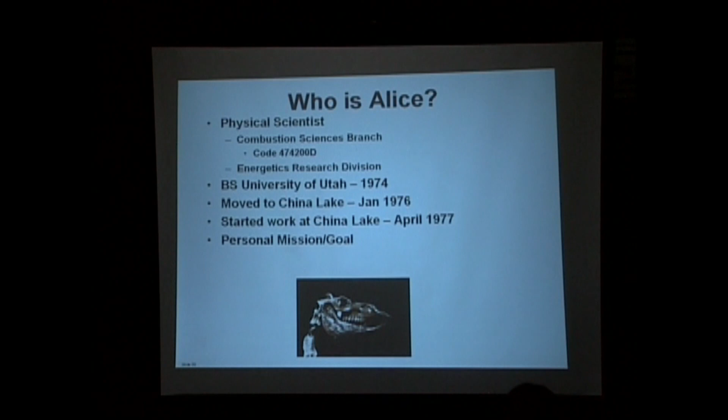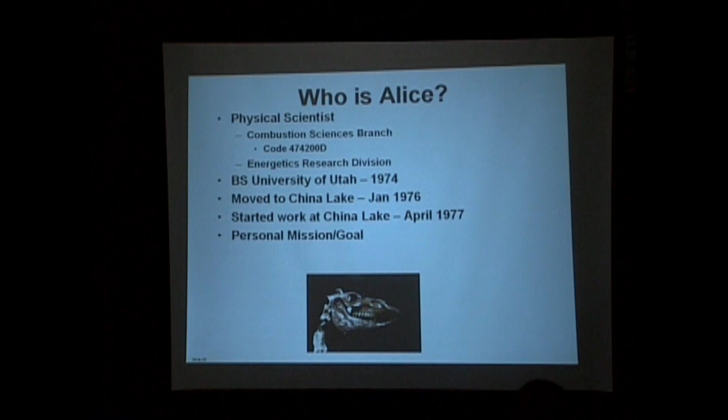The question you might ask is, who in the heck is Alice, and what did she do at China Lake? I'm a physical scientist. I work in the Combustion Sciences branch, in the Energetics Research Division. I got a bachelor's degree from the University of Utah in 1974, and my husband and I moved to China Lake in 1976. I mention this because Ken is the person who was hired by China Lake.

I just came along - we were newlyweds, so he's to blame for my being here. I started working in April of 1977, and since we're telling a story, there was no visit. Ken accepted the position here at China Lake without ever coming down for a site visit. We jumped in our two old cars in Utah and drove down here to move. It was January, and we left 1.5 feet of snow in Salt Lake City.

When we came down and got to about St. George, it was like heaven. So I said to Ken, never let me complain about the heat. Have I complained about the heat? No. Good. Okay, so imagine I stop in Barstow for directions to get to 395, and the guy at the gas station said, 'Lady, you're going into God's country. No one else wants it.'

Okay, so we drive some more. I get to Red Mountain, Johannesburg - it's like, Red Mountain, Johannesburg, what am I getting into? So when I got to Ridgecrest, things really looked good, and we've been here ever since.

So could you hit that again, please? A long time ago, we were all supposed to be empowered and have personal mission goals, and I really clicked into it. So this is mine, I'm going to share it with you: to provide the Navy a unique experimental capability relative to energetic material combustion. That's my personal mission goal, and I hope I can inspire you to have yours.

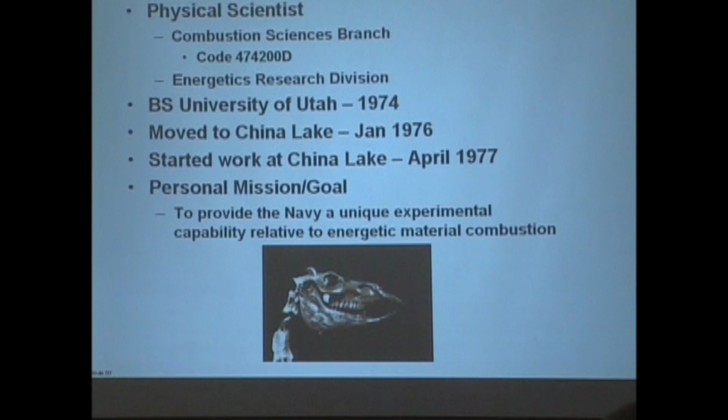We joke that I'm old as dirt - this is dirt down here. It's actually a skeleton from the La Brea tar pits, and I've never been that thin, so I don't think I'm quite dirt yet.

So what do we use these for? They are used to gain understanding, looking at ignition and combustion, and we do a lot of them. I hope today to weave together these tests to give you a story about ignition and combustion behavior.

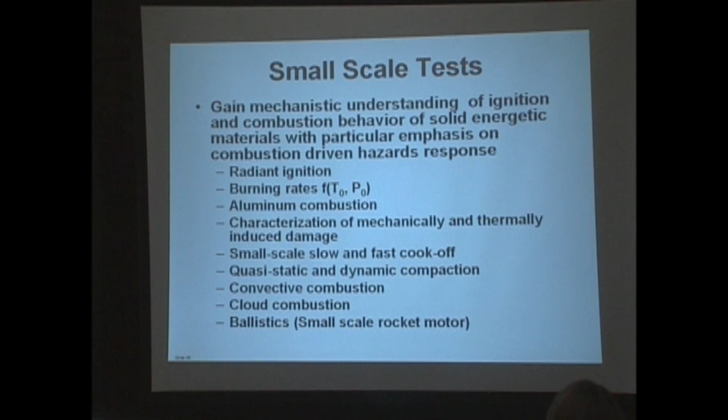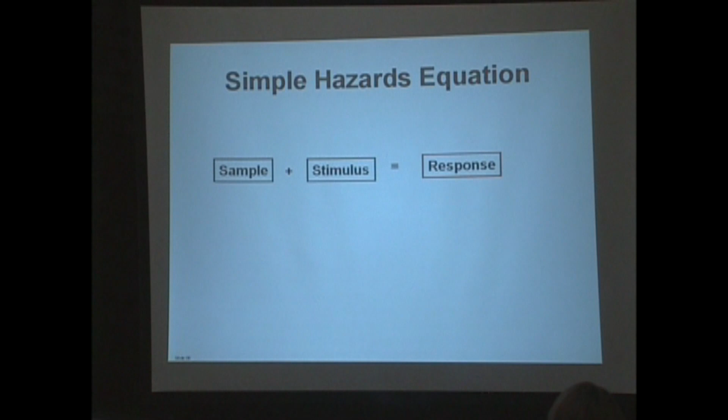From a very simplistic standpoint, what we want to know is something about the sample, the stimulus, and its response. Very simple. So when we talk about sample, I'm going to be talking a lot about propellants today, but it also applies to explosives and pyrotechnics. We're going to focus on solids.

Propellant in itself often presents the largest target when you're thinking about something coming under attack, from an insensitive munitions concept. So that's something to think about.

We have two regulatory bodies we have to be concerned with. One is hazards classification, for transportation and storage. That's the placards on the trucks you see driving around, the 1.1, 1.2, 1.3 kinds of things you hear talk about. The other is for our IM, insensitive munitions. Both of them are pretty critical.

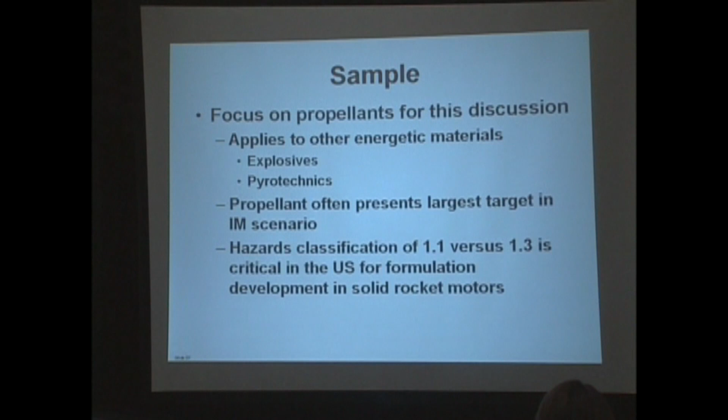When we talk about energetic materials, there's a lot of them: explosives, propellants, pyrotechnics, and even the neat ingredients.

I was very honored to be able to work with Dr. Arnie Nielsen in our chemistry division on CL20. It's an amazing compound, and it was an amazing piece of work, a real honor to work with a fine gentleman.

So we talk about stimulus. Usually we break them into two parts: the mechanical stimulus, which is shock or impact, and then a thermal stimulus, which can be either direct or indirect fire. Usually accidents involve both mechanical and thermal stimuli.

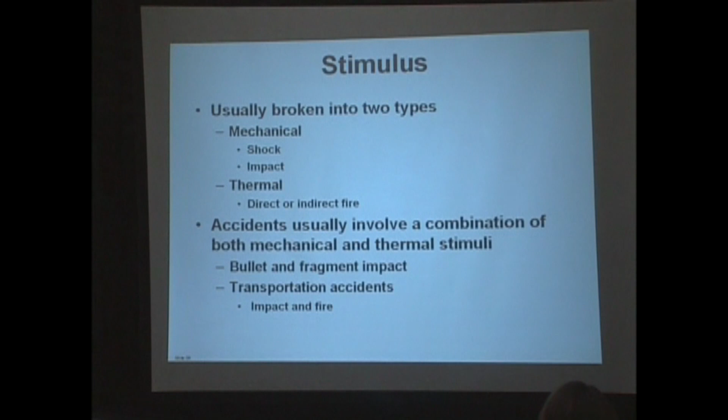A couple of examples: bullet and fragment impact, and transportation accidents. Usually you have an accident, there's an impact, and then there's an ensuing fire.

So when we talk about response, what do we mean? Lots of people think about detonation, but there's a lot more to it than that. You can have something from nothing clear up to a detonation, and we want to understand what is it that will cause our energetic to progress up to that high energy, more violent reaction.

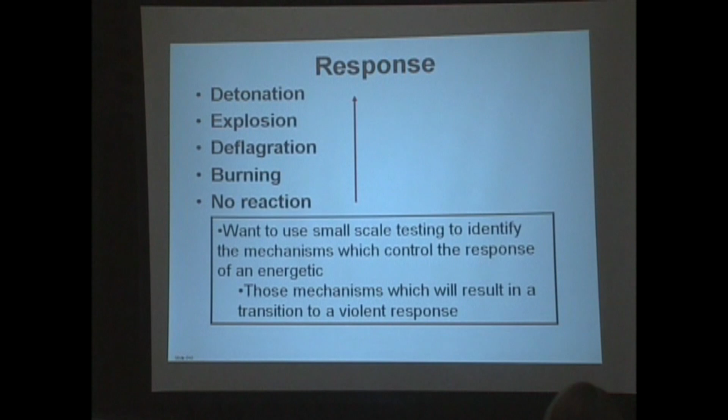So we're going to focus on combustion-driven events. Usually when we're talking about combustion, it's from the standpoint of, is my rocket going to fly, or how far is my rocket going to fly? We want to know about ignition, flame spread, and then the steady state burning.

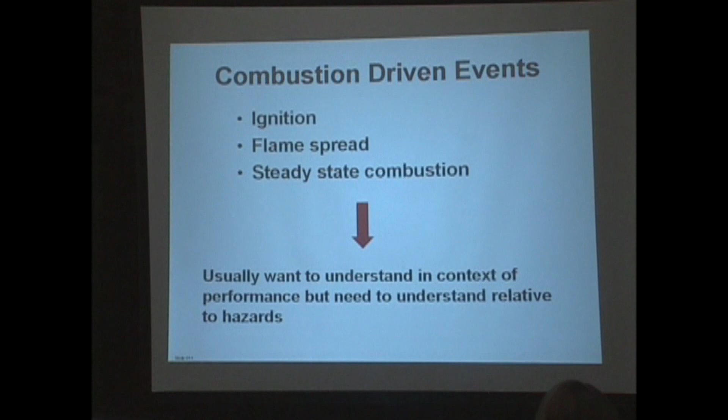From a hazard standpoint, we need to expand our horizons a little bit. We need to expand our viewpoint.

So let's start with ignition. It's a process, by our definition, the process and the successful completion of that process. It's the beginning of every combustion event. Propellant must ignite reliably in the application, but be immune to inadvertent ignition. It's going to go when you want it to, but not go when you don't want it to go. If it doesn't ignite, your motor and payload become an impact hazard themselves.

You can have significant blast and overpressure without true detonation, and we're going to look at a film of that today. The payload itself may present a hazard—if you have a nuclear battery on board, that could cause you some problems. Inadvertent propellant ignition also creates a thermal hazard.

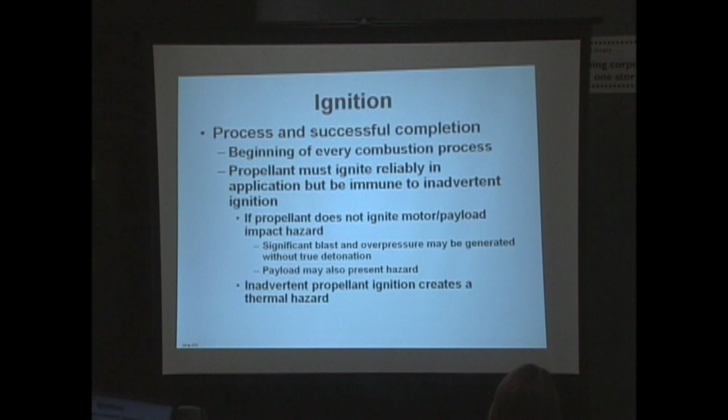Some people in our group have been studying this, and many people in this audience have worked on that, where a rocket motor in a building, or in a storage building, caught on fire.

Here's the real deal, this you can find on the internet. It was a firing of a Black Brant rocket on 6 March 2005, Poker Flat, Alaska. Good thing it was in Alaska. The second stage did not ignite. The findings were that the igniter functioned but failed to ignite the propellant grain.

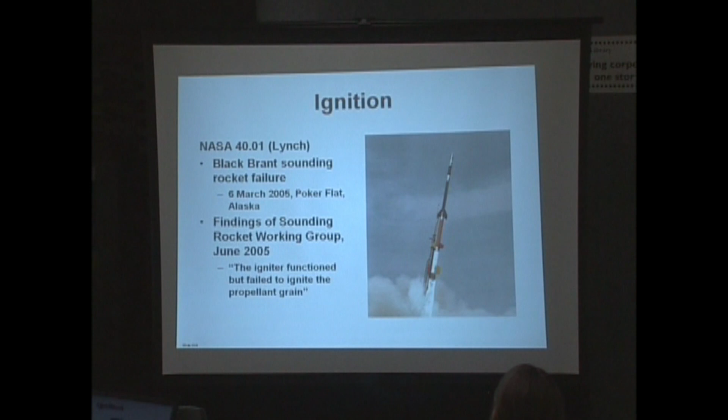I show this one because Mr. Ford had the opportunity to work with these people. The propellant is made in Canada, and they sent us propellant. We tested it for them, and we've worked with them on two other occasions helping them design their improved igniters.

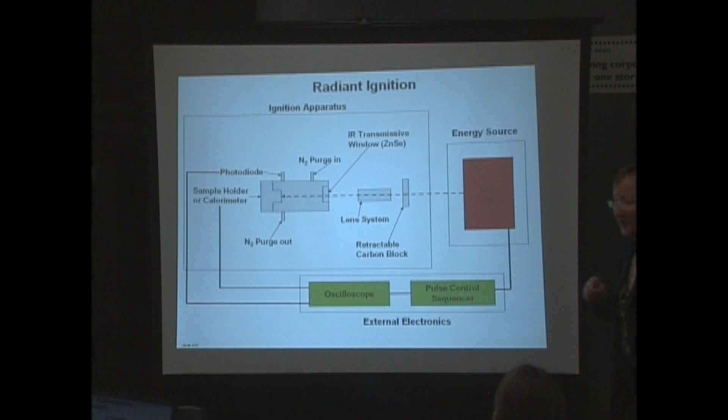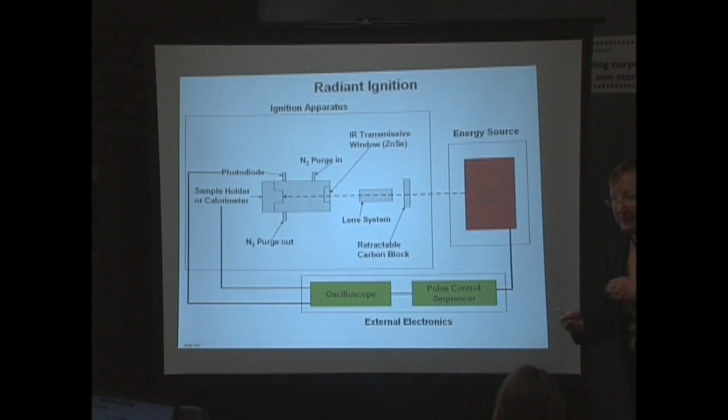So what do we use for that? We have a CO2 laser that provides radiant thermal stimulus. We have some lensing, we have a sample holder, and what we do is vary the amount of time we expose our sample to get an idea about how it's going to ignite.

We plot our data in log time versus log energy. I'm going to show you some of these plots, so we'll spend a little bit of time with this.

If we pick a flux level and start to heat our sample, and turn our laser off in this region and look at our sample, we see nothing. It's not until what we call first light, or first gasification, that we start to see something going on the sample surface, some erosion coming off the sample. But many times the sample does not continue to burn. It's not until we reach what we call a go-no-go ignition locus that, if we remove that energy, the sample will continue to burn. From our perspective, that's the point the thing is truly ignited, not down here.

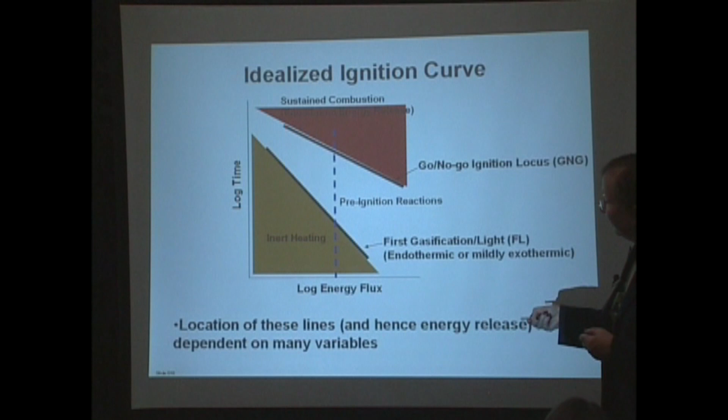Now, my European colleagues would argue otherwise, so we have some open debate here. The relationship between these two lines is very much a function of the energy, the flux, the pressure, and the kind of material we're testing. So let's take a look at a few examples.

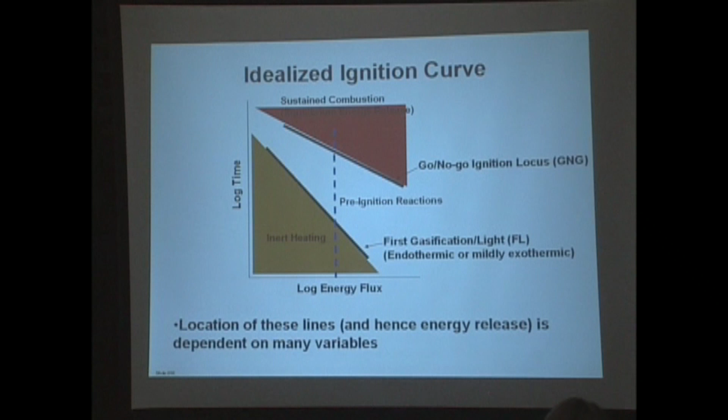However, you can generate a lot of reactive gas. When we start to think about hazard, and especially DDT, that's an important factor.

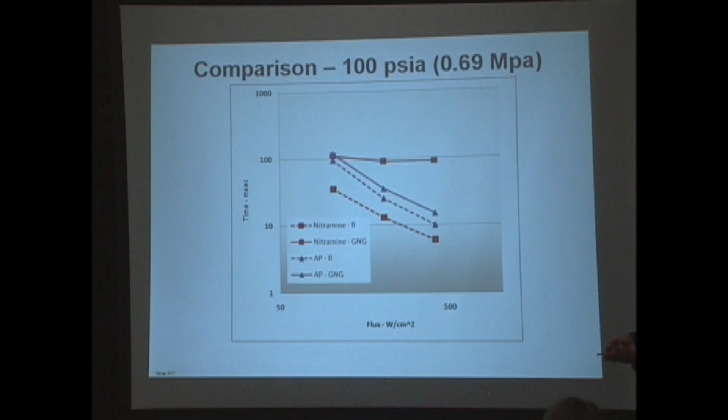Keep that in mind, we're going to come back to it. That one's going to come back to bother you in a few minutes.

A general observation: AP-based propellants will ignite and burn at low pressure with little or no pre-ignition time. This means increased vulnerability to friction and fire stimuli, there's the hazard. The relationship is also there in something called burn to violent reaction, or fragment impact.

Double base or nitramine-based propellants, which are often our 1.1 type materials, are more difficult to ignite at low pressure and often have a very long pre-ignition time. That contributes to the DDT problem.

Within a family of propellants, this is why I said keep in mind coarse versus fine. The higher the burning rate, the easier the propellant is to ignite. So now you're going to predict which of those two AP-based propellants has the highest burning rate.

Fine, fine. So let's talk about combustion.

Very simplistic: gas production in a closed or semi-closed environment is key to reaction violence. How much you confine it really is important. The opposite is, the sooner you vent, the more you can ameliorate your hazard. It really can separate between propulsion, explosion, and even detonation.

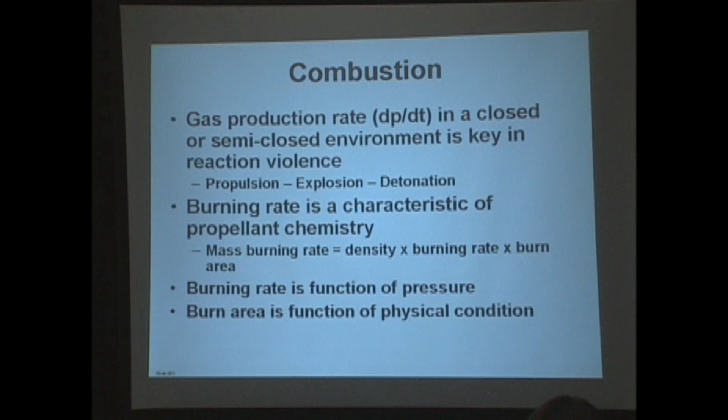Okay, let's try our Delta rocket.

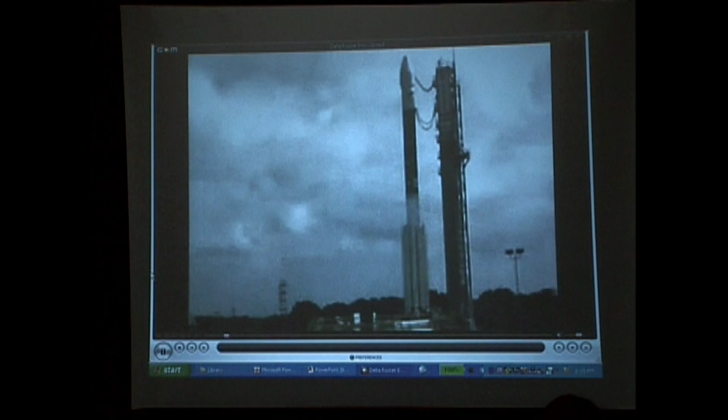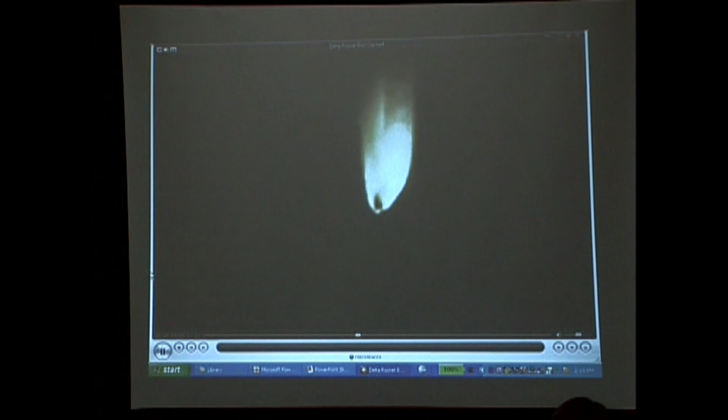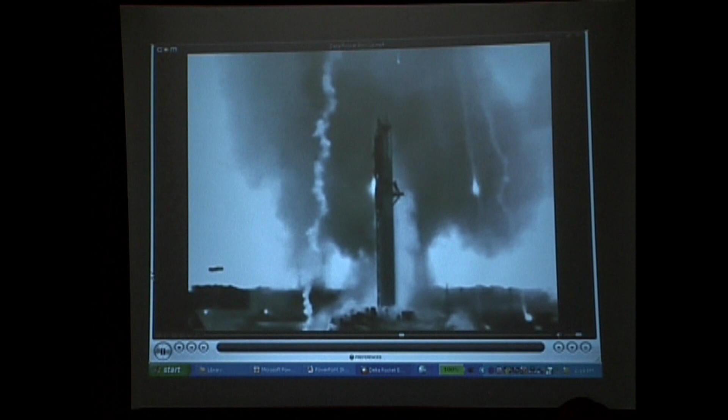Crack. Surface area?

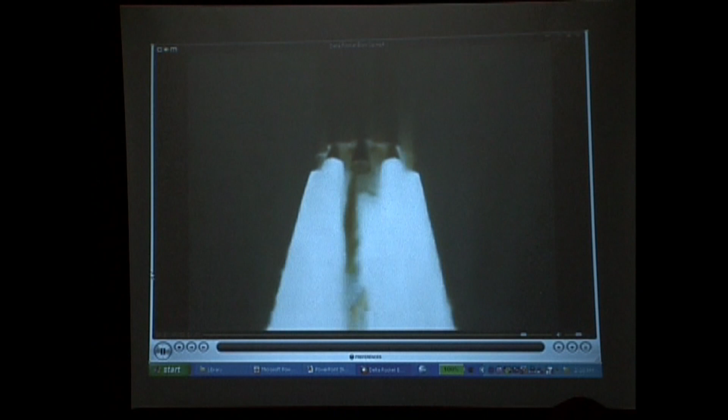This was in 2006, so not that long ago.

We couldn't figure out how to embed it, so this is the best we're doing, and I think it worked out pretty good. You can find this on Google if you want it, that's where it came from. I was told that some people at PRL worked on this, on Delta, after this incident occurred, and some people here at China Lake were involved in some of the studies done for this.

Okay, next slide. We take pictures too, but not quite so spectacular, and much, much smaller. This is a diagram of our high-speed setup. We use this to measure burning rates and combustion studies. We put a sample in a vessel, a windowed vessel, and use a high-speed motion picture camera to take a picture of it burning. Occasionally we have to use illumination to look at the material itself.

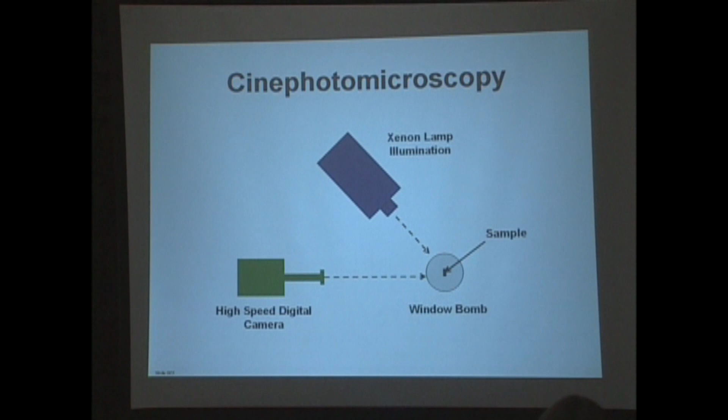So I'm going to entertain you with a few more movies. Some people ask, what's the difference between minimum signature and what's smoky or fuel metallized samples? And the answer is there's no metal in minimum signature. If you have a sneaky airplane, you probably want to have a sneaky missile as well.

Now, when we talked about a hazard, this propellant could become a hazard. What's the flux these things put out? We need to understand what's going on. Perhaps we need to look at this material a little closer. So let's look at the next slide. Oh, okay, I'm ahead of myself, sorry.

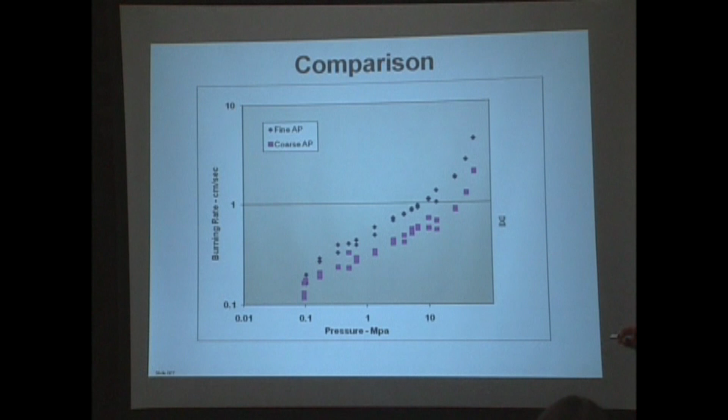And that's some of the work that Amber and her team are working on right now, to make it so that these new propellants coming out do not burn so well at low pressure. Okay, so now we'll go back. Go ahead, go forward. If we really want to understand what's going on the surface, we have to increase the magnification, and so that's what this is.

So let's break it up. We talked about the crack. Now let's make a mess out of this thing. Next, to do friability, or what's sometimes called shotgun work, it's really two experiments. First you have to damage the material, and then you've got to figure out a way to evaluate it. So we use a high-impact device or a shotgun to damage the material, and then we use a closed bomb to evaluate that damage.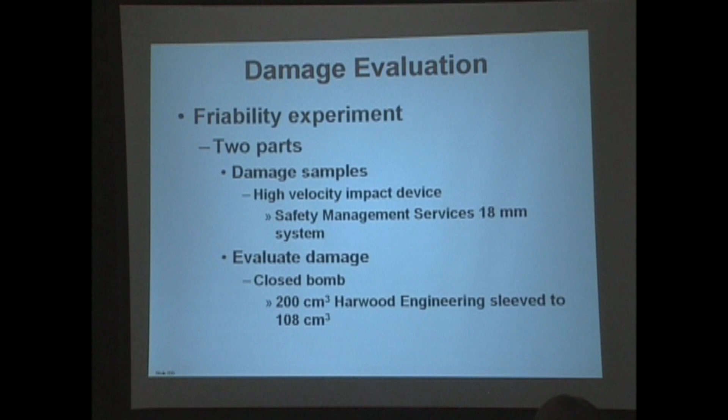Right now, to do that, this is a test that's actually used for hazards classification. It's called friability. We have to sleeve it to follow the spec, to 108 cubic centimeters. Next, here's a layout of the experiment, very simple.

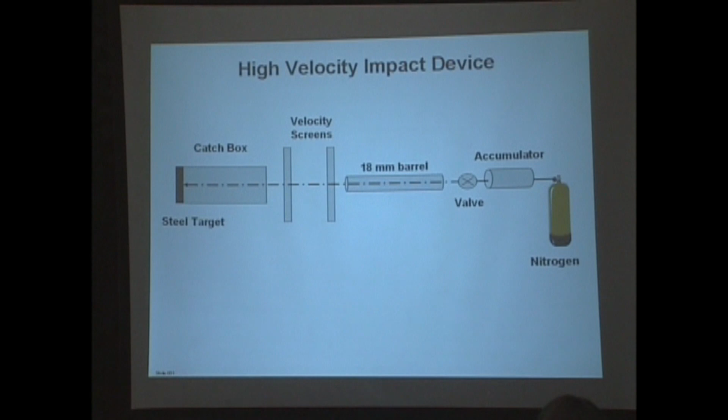We have a gun. We can fire it either with gas or a powder load, depending on our velocities. We fire it into a catch box, gather up the debris, and then we test it further.

Next, so here's the deal. Do you propel the propellant sample, or do you shoot the impact propellant? We propel the sample - a cylindrical sample. That's why it's shown like a cylinder here.

First, closed bomb theory, for those who do burning rates for gun propellants. You would fire a sample of known geometry, collect your pressure time history, and use that equation we talked about: m dot equals density times the linear burning rate times the burn area, put that in the form of a geometric form function. You calculate your thermochemistry to get your m dot from your pressure time history, and you can solve for your burning rate as a function of pressure. It's done all the time. It's been done for years.

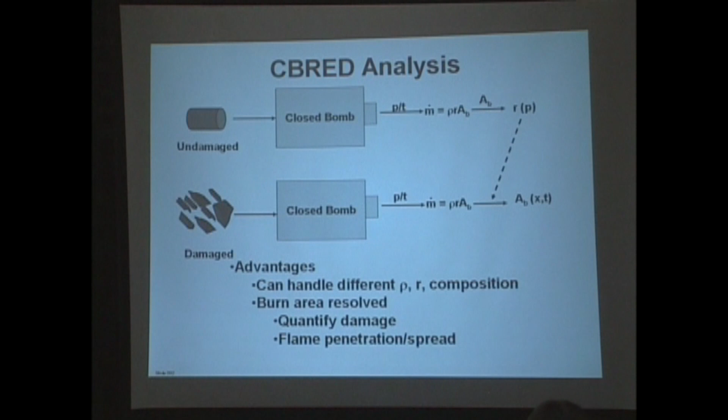Okay, let's get clever now. Let's say we damage that same material. We sub in our burning rate into this equation, and now we can solve for the area. There's an advantage to doing this: now we can compare materials with different burning rates, because we've taken that out of the equation.

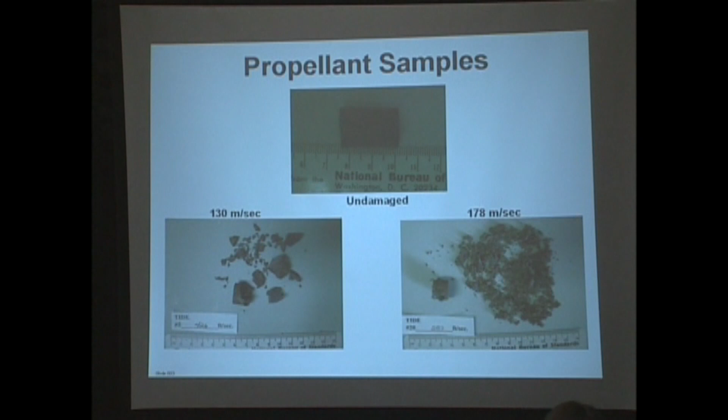Here is an AP HTPB-based propellant, undamaged, and at two different damage levels. We can fire these fast enough that we can turn them to dust. In fact, we can even ignite them if we go fast enough.

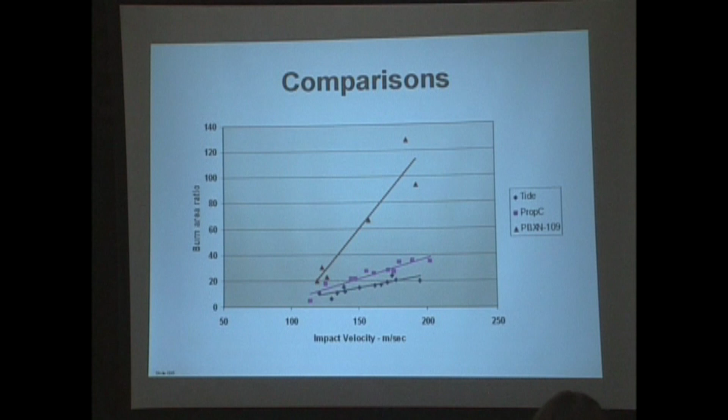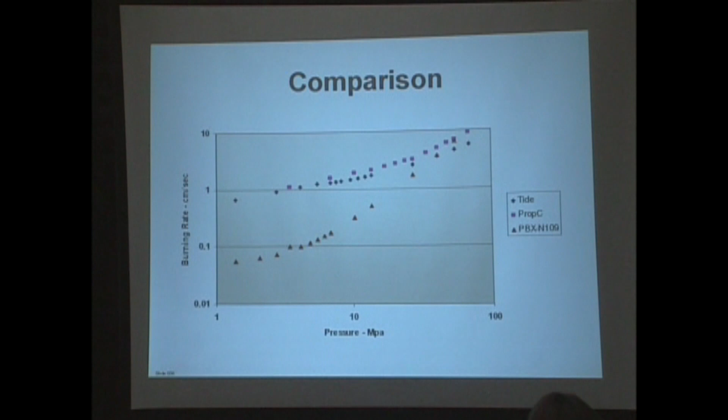Now we've really made a mess of things. We've got it into almost dust.

One of the ways we study this, and most recently, that's how I caught Anne's attention, was I was talking about this experiment. What we do is we throw a piston into a bed, a porous bed, a bed of energetic material. This experiment is the design of Harold Sandusky and Wayne Elban. Sandusky is at NSWC Indian Head. I wish I'd invented it.

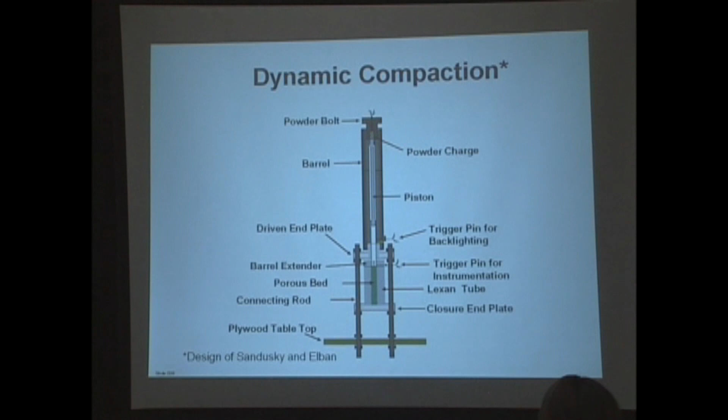It's a great experiment. The piston comes down, strikes the bed. Now we can instrument this bed to look at various aspects of what's going on in the powder. We're using this right now to examine pyrotechnic powders, but it was designed for things like HMX.

So let's look at this. Our piston is going to come down at 162 meters per second, strikes that bed. Now we see behavior, really two kinds of behavior coming along. We see that compaction wave, and then we see the great ball of fire, if you will.

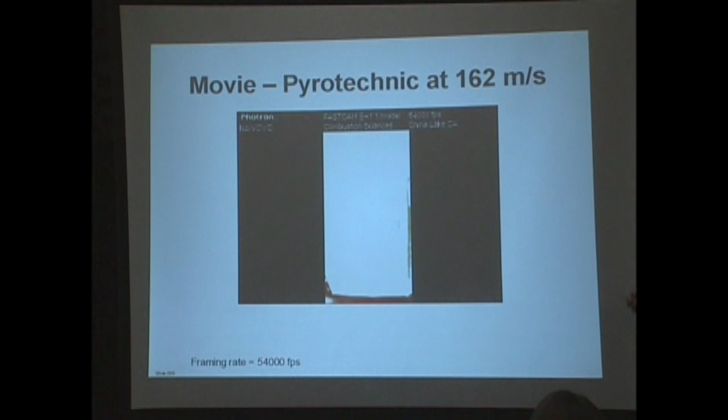We can take some frames, and you can see here very easily how we can make some plots of these two things. These data have been used to develop a powder model, which is then used to predict the behavior of this material in its design, in its system.

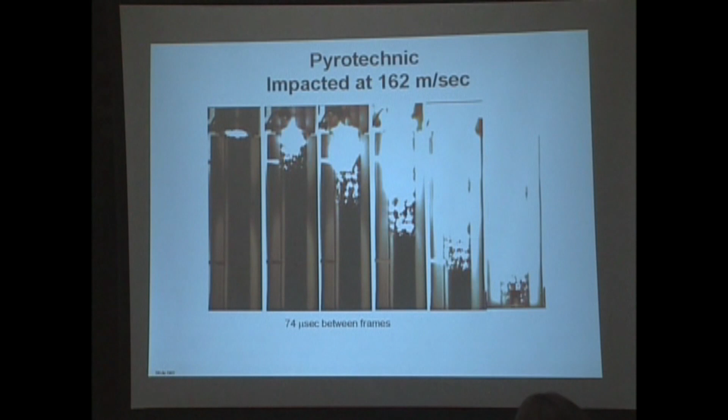And here's the plot of the stuff you just saw, and there are the two various rates. Remember, it was 162, they go quite a bit faster, but they are a function of how fast we throw the piston. So this is, we've determined from flash X-ray studies as well, the compaction wave.

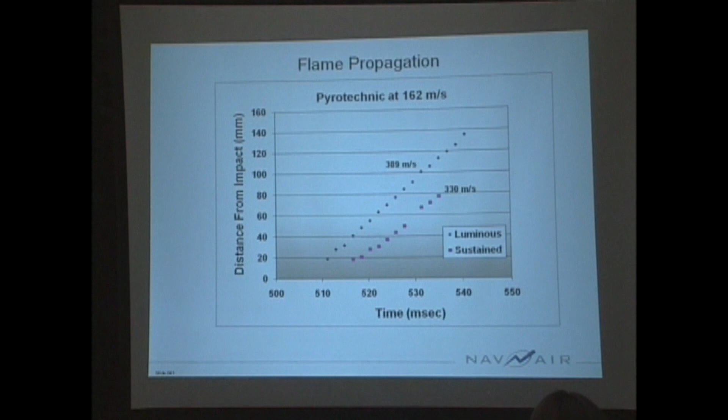And most recently, we've concluded that this behavior for this material is the friction on the walls. This material is highly friction sensitive, and so we're seeing the friction behavior on the wall, between the material and the wall. You mean the friction heat generated by the friction? Exactly, yes.

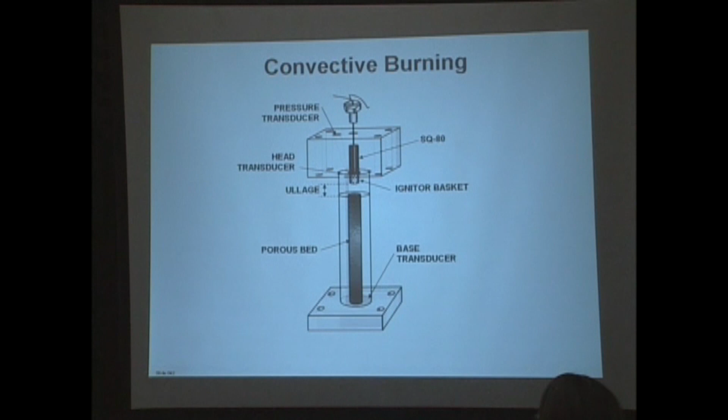So, okay, let's take away the piston and look at thermal. Instead of using a piston, we will initiate this material thermally. Many times there's a difference in the sensitivity of a material, whether it responds to a thermal or mechanical stimulus.

Okay, next. This is for the explosive PBXN-5, and PBXN-5 is mostly HMX. It has about 5% of an inert binder, if you will, sometimes called a desensitization material. So I'd like to point out these numbers.

We tracked that flame going through the bed, and we have 18 meters per second and 271. This is classic behavior for something going to DDT. Next.

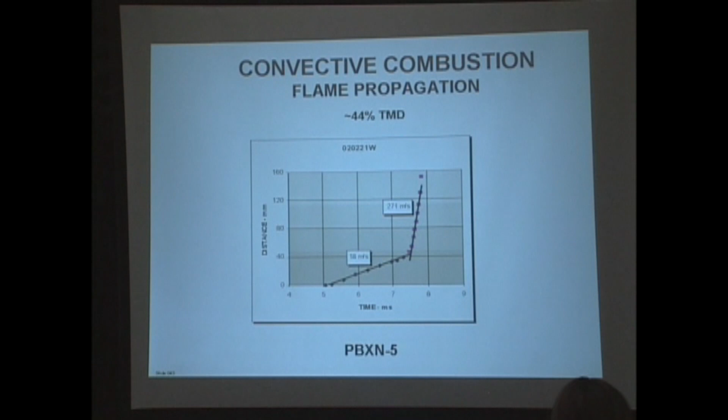Here we have a plot of burning rate versus pressure. I've overlaid the neat HMX burning rate curve. Let's just pick this number right here: this is 55 centimeters per second at 200 megapascals. I believe that's about 30,000 psi. And okay, we got a little discrepancy here.

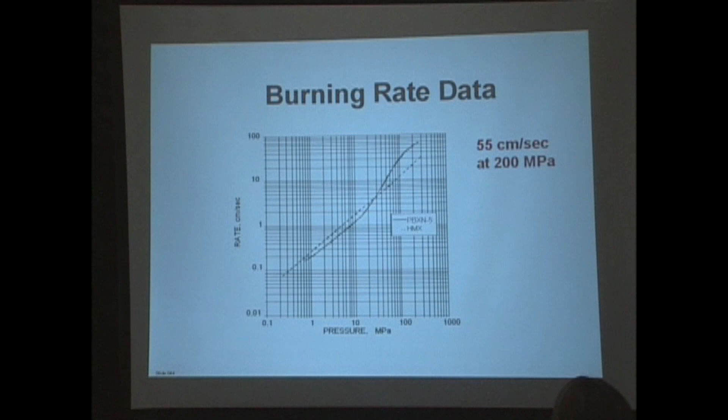Remember the last one? Next slide. We have a rate, a big difference in the rate here. One of these wasn't really burning completely in the sense that we talked about complete combustion.

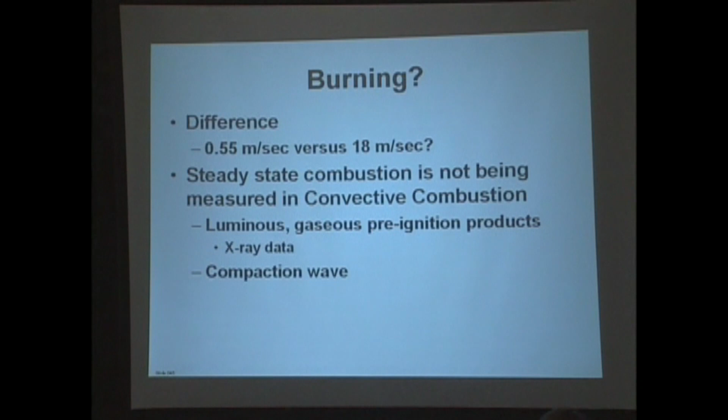Much of that is our pre-ignition products. It puts out lots of light, and that was confirmed by our X-ray data. Most of it is the compaction wave that we're measuring. To let you know, Mr. Curran, who made these measurements, the flame was clear, or the apparent flame was clear to the bottom of the tube before any pressure was measured at the bottom of the tube.

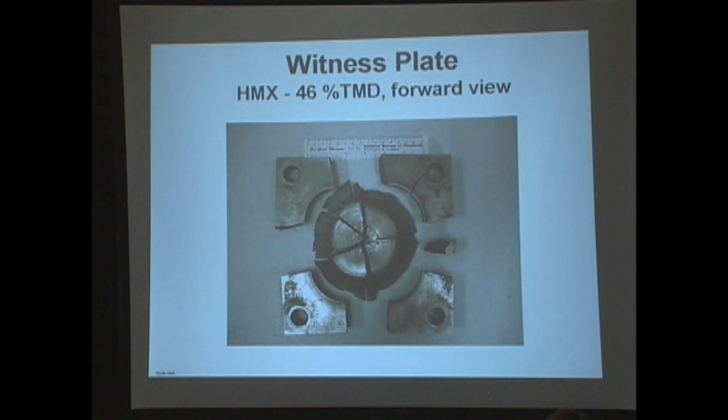Okay, next. What if we take away that desensitizer and just do pure HMX? Next, the rates are almost the same, but there's the witness plate. So there's an example of the two. 5% makes a big difference in what you've added.

Next. Okay, one of our more current work is the work on cook-off. These are images taken from the Forrestal. The accident occurred in 1967. The Navy lost 134 people. This is part of the reason that I continue to work today, because this is a hazard that we haven't made a lot of progress on, even after all this time.

Next. Thermal insult is of a particular severity for the Navy. When you're on a ship and there's a fire, you don't have a whole lot of places to go. The potential for fire is very high. The potential for ordnance to be involved is very high, and there is no getting out of it.

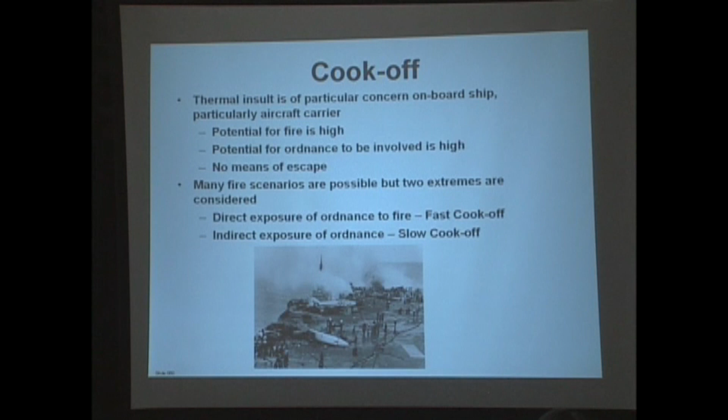Many fire scenarios are possible. You can come up with all kinds of things. We hear about different ones every day. For this regulatory issue, two are considered: direct exposure, often referred to as fast cook-off, and indirect exposure, called slow cook-off. In other words, the fire is adjacent to your store.

Next. So IM testing, you have to test with both of these. Slow cook-off, the conditions are 3.3 degrees C per hour. This comes under a lot of criticism. Everyone says it's unrealistic. There used to be the opportunity for a threat hazard assessment. Some of that's going away now with jointness. Whose threat do we use? We use these ordnance items in many applications. Whose do we pick? So that's coming under scrutiny as well.

Fast cook-off, the conditions are fairly widely accepted. This is where you put the item into a fuel fire. However, that fire is very difficult to control. It's pretty expensive to run that test. Environmental concerns are big. Germany right now has banned it, the use of liquid fuel like kerosene.

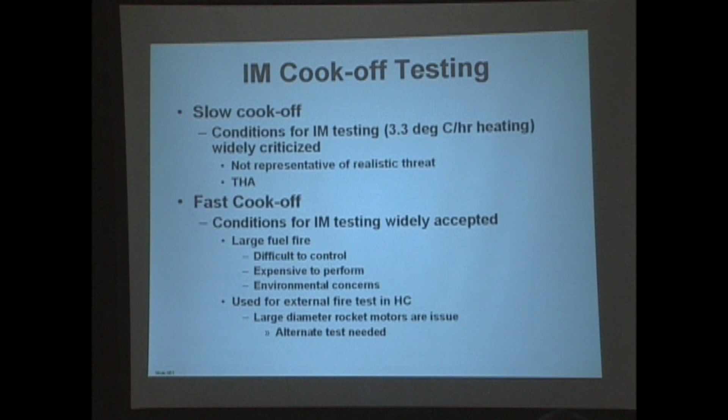Large diameter rocket motors become a particular problem because of their size, the amount of fuel that you need, and the amount of time that's required to burn that fuel. So we need, from our perspective and opinion, an alternate test for that. Next.

This is a small-scale test that we used in concert with some work we did jointly with the Department of Energy. Essentially, it's a pipe bomb. You cartridge load up your samples, heat the walls, and measure what goes on. Next.

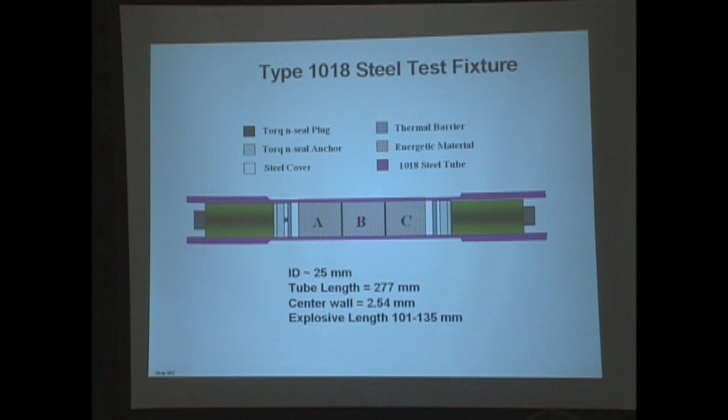Now, we're back to my drumbeat about surface area and porosity. This is LX10, another nitramine-based explosive. It's a pressed one. We're very fortunate - it's pressed at full density, 98% of theoretical maximum density. And this is the same amount of material pressed to only 75% of its maximum density. Now we're going to stuff it in that bomb and we're going to cook them off. Next.

Which one was the most violent? This one. Okay. All we did was change the porosity. So I hope I've convinced you that surface area is important.

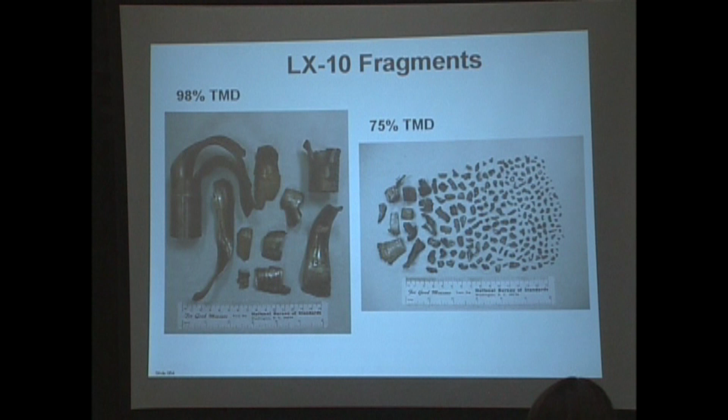If I haven't convinced you, this is the explosive PBXN-109. We're going to look at two burning. One of these is the material as it was generated, as it was made, and the other one has been through a slow cook-off test. Turns out many times when we run slow cook-off, especially with this material, we can go out to the range and pick up pieces. So that's the one that's been through a slow cook-off.

Okay, Kevin, let's look at them. Now, my combustion experts sitting back there will tell you that's really not very good. 30% char, even at 8,000 psi. Okay, let's look at the other one.

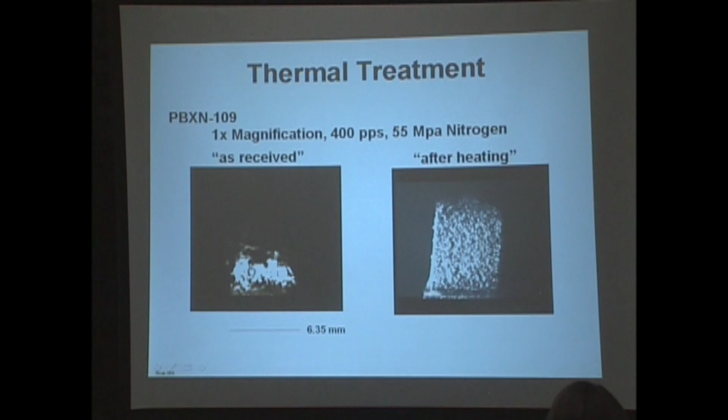Is it different? Okay. Now, if you're cleaning up a range, please be very careful about what you pick up after a cook-off event. Enough said.

Next, fast cook-off. This is ongoing work, the work of Mr. Ford, who's sitting back there kindly showing the view graphs. It was first started with respect to large diameter rocket motors and the difficulties in testing. It was supported almost entirely by the Department of Defense Explosives Safety Board, the people that do hazard classification. But it's now very much of interest in insensitive munitions as well.

The key here is to have the conditions of a fire, but do it under a controlled environment. Control is the big deal.

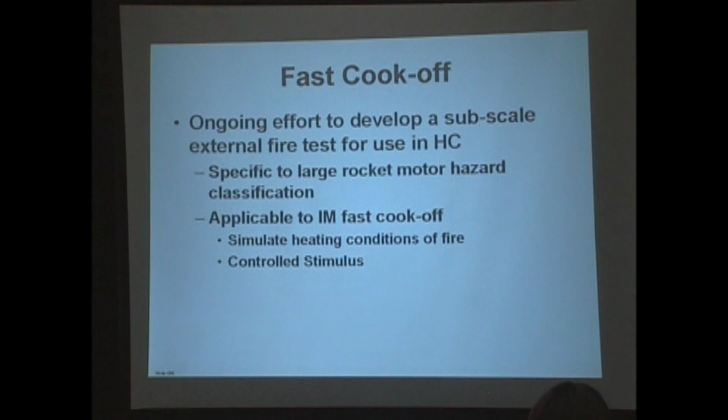So here is a cartoon of the device, and since we're telling a story, this device was designed and built by our air breathing expert, Mr. Ken Wilson, over at PRL, just on the other side of this building, and it was nicknamed Alice's hairdryer. That's why you don't have any hair.

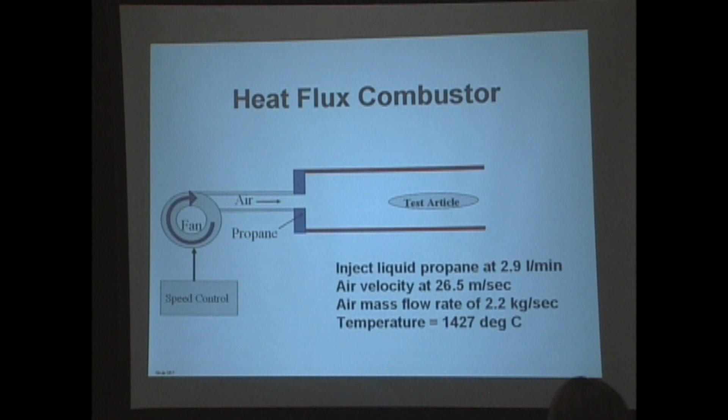The fan blows air. We inject liquid propane and burn it, and put the test article in the environment, a laminar type environment. By changing the mass flow rate, the velocity, the amount of air you deliver, you can change the flux. Wonderful experiment, and it's great because we've incorporated some of our modeling and simulation all the way through this. They were key in helping us design this experiment.

Jim: Is the sample contained in anything, or is it just a bare sample? It's contained. Okay, we'll get to that next.

Here's a picture of it before it moved out to where it's now being used to be tested. Here's the fan, here's the injection area, the mixing chamber, and our witness plate. We can use one of these tubes as a witness plate. And this is a picture of the test article, Jim.

One of the important things is we have a flow diverter on the front end because we want all our flux to be delivered to our sample on the cylindrical part of the device and not create a hot spot in the front. And so even that was modeled so that we could have an optimum design.

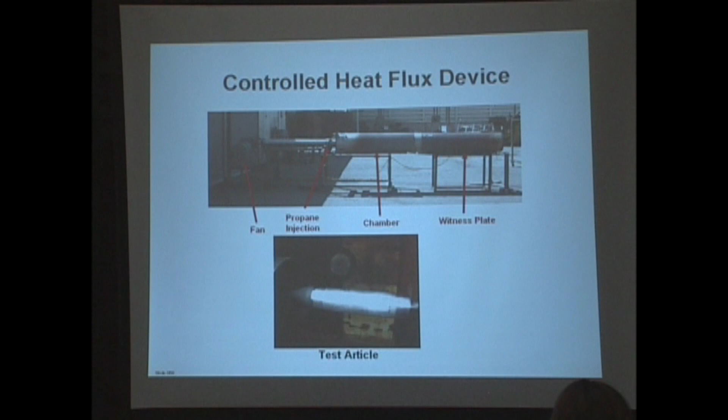Next. I'm not going to say a whole lot about this because I want you to all invite Kevin to come and talk about this very soon. It was designed to replicate fuel fire fluxes, which run about 20 to 200 kilowatts per meter squared.

Here's an example of how reproducible his experiment is. There are 3 of them here. 1, 2, 3. You might ask, what's this rise here? That's the tube starting to radiate, and we haven't got feedback built into the experiment yet.

Here's an example of a fire. Same calibration tools, and you can see it's not too reproducible, even in the same fire.

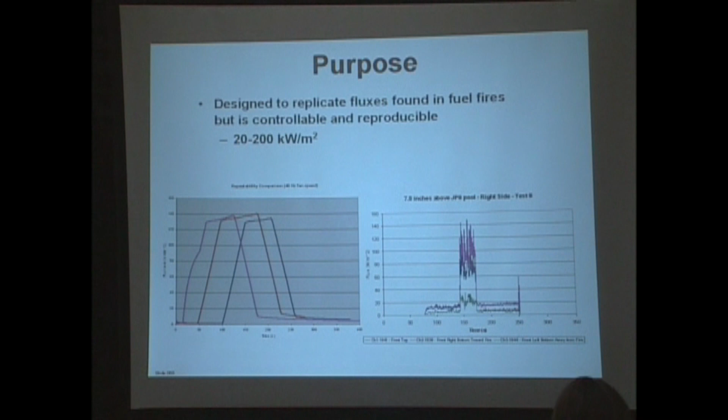Jim asked about the sample, or the test article, we like to call it. That's very, very critical. So we instrument the material, we fill them. Kevin's gotten very clever, he can even put a bore in them. Amazing. And we insulate both ends because we're very much interested in what's going on in the center of that cylinder.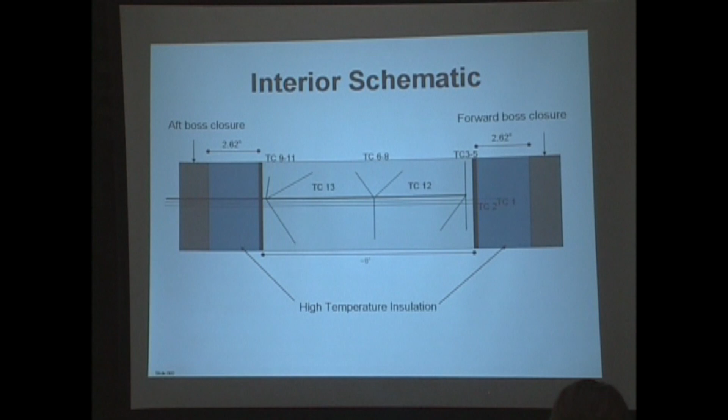Okay, Jim, here's the difference between tactical steel, tactical composite, and a large diameter rocket motor. In fact, we simulated the rocket motor case of a large diameter, and it was half inch aluminum and composite. So this is just picking off, out of those 13 thermocouples, the change in temperature.

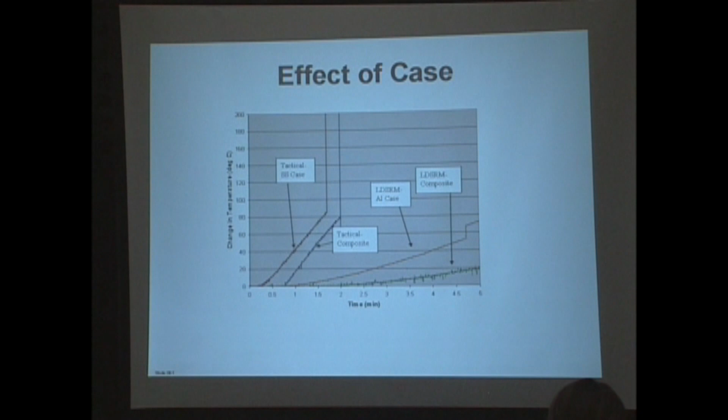Ephraim and his team have been modeling this. I'm going to summarize since you're all bored and half asleep.

A variety of small-scale tests are used all the time to gain understanding of both combustion and hazards. Ignition is the first step in the combustion process. Handling threats are a big problem if something's very easy to ignite. Long pre-ignition times are particularly of interest if we're studying DDT and that kind of behavior.

Steady state combustion varies with pressure. Low pressure combustion is related to fallback and extinguishment - we saw a really spectacular fallback problem.

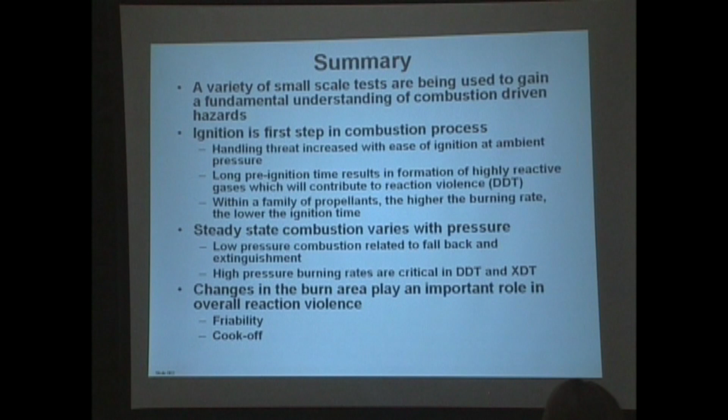High pressure burning rates are critical when we're starting to talk about DDT and XDT - unknown detonation transition. Changes in the burn area play an important role in the overall reaction violence. If I've left you with anything, I hope it's that. This can occur both mechanically, which we test with friability, and in cook-off.

We have a subscale fast cook-off test. It has to mimic a fire, and it is controlled and reproducible. I was recently in Meppen, Germany, because now we're trying to come up with an external fire - this sounds backwards - which will use propane.

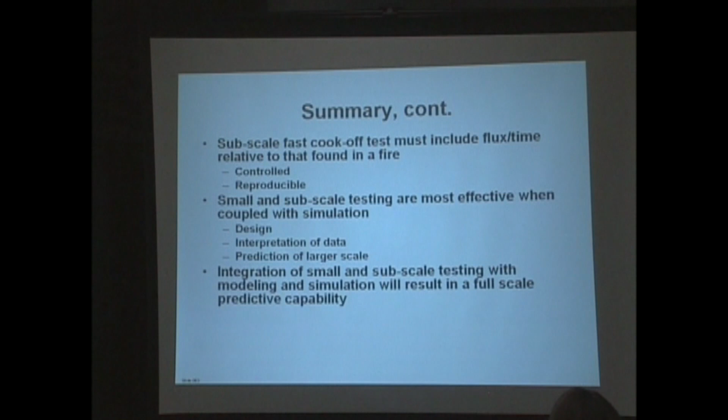Small and subscale testing is really, really effective if you couple it with modeling and simulation. You need your modeling team close at hand, either in your building or somewhere you can pick up the phone and get hold of them quickly. It's used for design, for interpretation, and to predict - and that's where we're headed. We'd like to be able to predict.

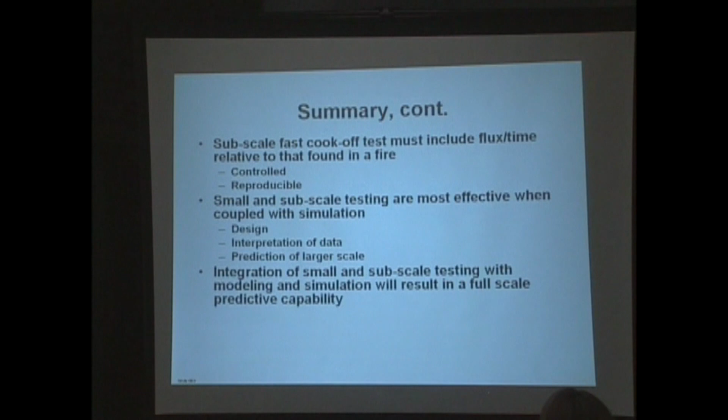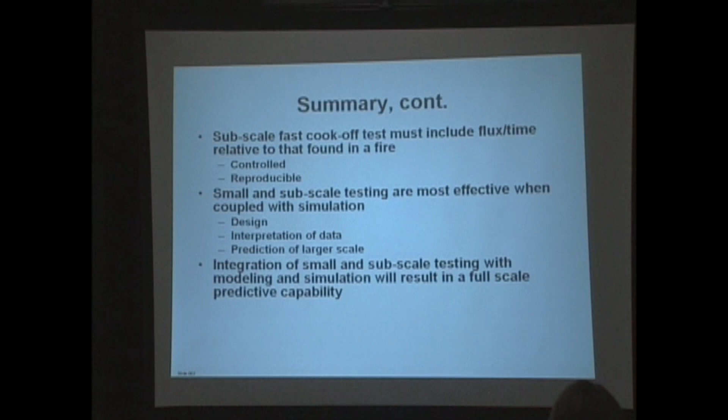With these small scale experiments, we'd like to predict what's going to go on in a full-scale environment. Here's my mantra again: integration of small and subscale testing with modeling and simulation will result in a full-scale predictive capability, I hope in my time.

I am dirt, remember. I think that's it, Kevin. Yes, thank you.

Are there any questions for Alice this afternoon?

When you're talking about surface area, are you just talking about how closely all the particles are packed together, or are there other geometries? Oh, there are other geometries, yes. How do you test those?

Well, the way we use it is with our closed bomb technique, and we just calculate an S over V, a surface to volume ratio. But there are, like some of the work Rick's working on, microscopic techniques to look at porosity and interstices.

There's the SEM, which is a very good tool, especially if you can apply some load to the sample, to look at binder-filler interactions. There are tools like void content measurement and some mechanical properties, and those together can give you a very good feel for the integrity of the material. I didn't mention it, but you can introduce about 5% void in high energy material and increase its shock sensitivity by an order of magnitude.